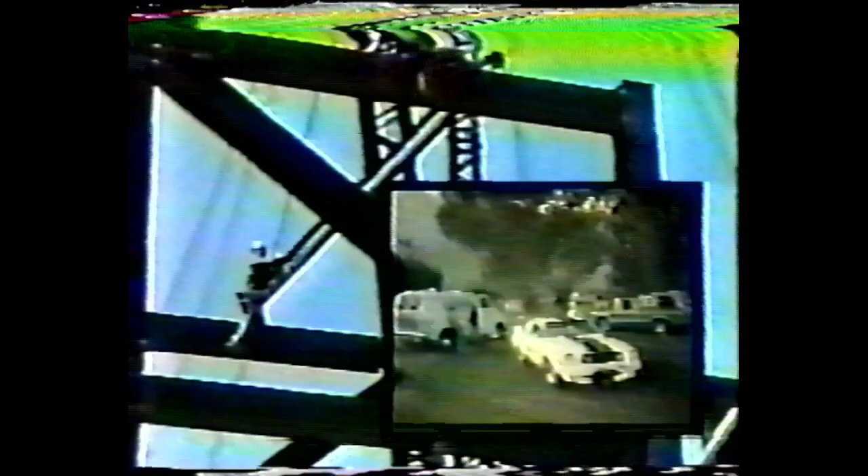It surrounds us, in the cars we drive, in the buildings where we work, in the multitude of products we depend on every day. It protects our possessions and entire nations. It packages our food and our appliances.

For nearly a century, steel has fueled the fire of an industrial revolution. In the process, it has created communities, livelihoods, lifestyles. Each year, the free world consumes nearly 800 million tons of steel. The United States alone requires 1/8 of that amount.

Steel is a manufactured product, born of fire and human effort. But it also is a gift of the earth. It takes iron ore to make steel, and it takes engineers and miners with the help of massive earth-moving machines to unlock those vaults and exploit the vital riches within.

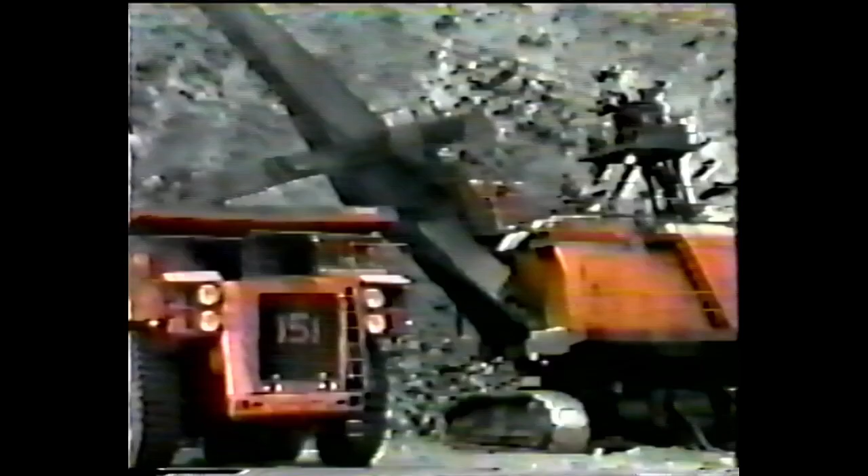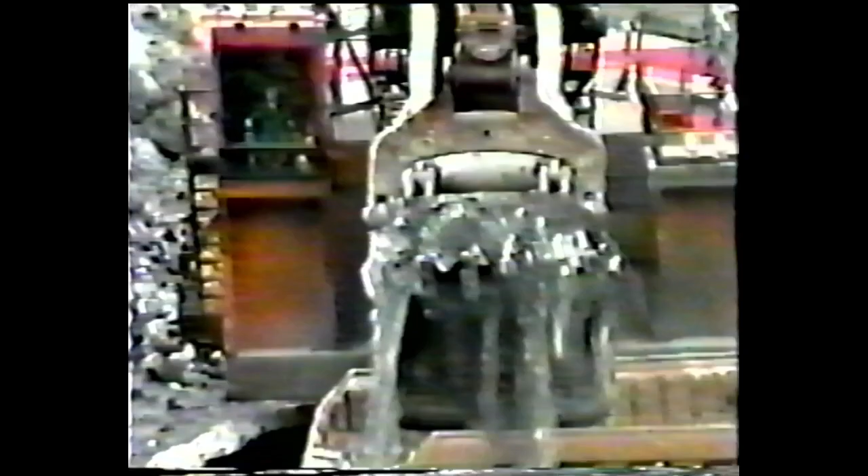For over 3 decades, the Iron Ore Company of Canada has maintained a position of prominence among the iron ore producers of the world. The largest iron ore producer in North America, IOC ships its products throughout the globe to help feed the world's hunger for iron and steel.

IOC's main mining and processing facility is located near Labrador City in the province of Newfoundland, Canada, where the summers are short and winter temperatures can fall to 40 degrees below 0 centigrade. Here, the company can produce up to 20 million tons of refined iron ore products a year.

IOC owns a major interprovincial railroad, the Quebec North Shore and Labrador Railway, which serves both as a shipping line for iron ore cargo and as a lifeline to the communities of western Labrador.

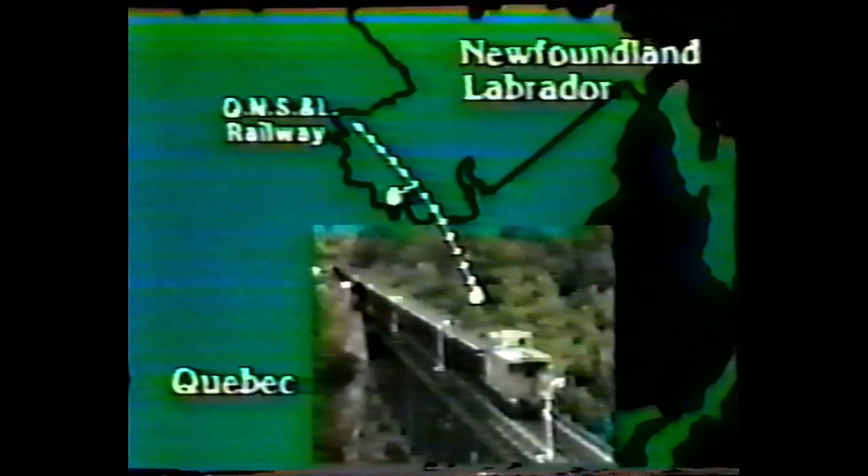At the other end of the railroad, in the port town of Sept-Îles, Quebec, IOC operates one of the largest bulk shipping terminals on the continent. From here, IOC's products are shipped throughout North America and to distant ports of Europe and the Far East.

It's an impressive company with an even more impressive history. Since Leif Erikson first landed on the shores of North America 1,000 years ago, the subarctic forests of northern Quebec and Labrador went largely unexplored.

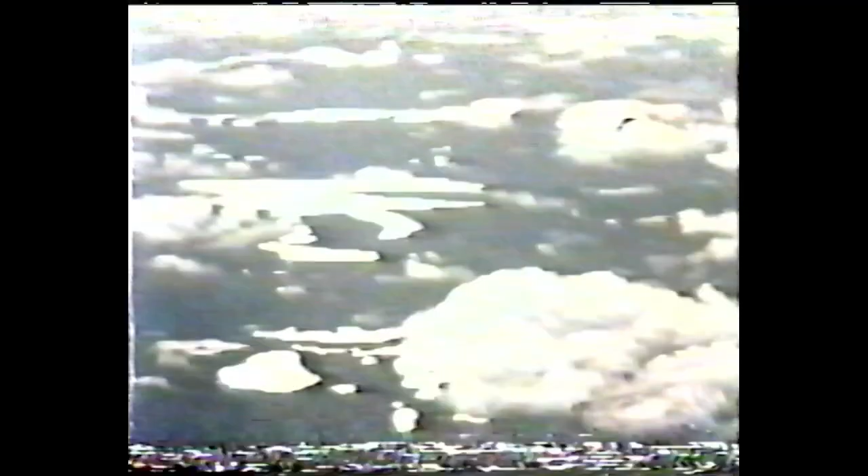But by the 1930s, interest began to grow in the region's potential mineral resources. Of special interest to the United States steel industry was iron ore, because the natural iron ore deposits in the United States were becoming depleted after over half a century of mining.

By the 1940s, as the winds of war swept around the globe and the need for weapons and armor heightened, exploration activity increased, resulting in the discovery of over 400 million tons of iron ore reserves near Knob Lake in the northern reaches of Quebec and Labrador.

But exploiting the deposits presented many obstacles. One was how to retrieve and ship the iron ore from an undeveloped land 40% covered by lakes and marshes that experienced some of the harshest winter weather known to man.

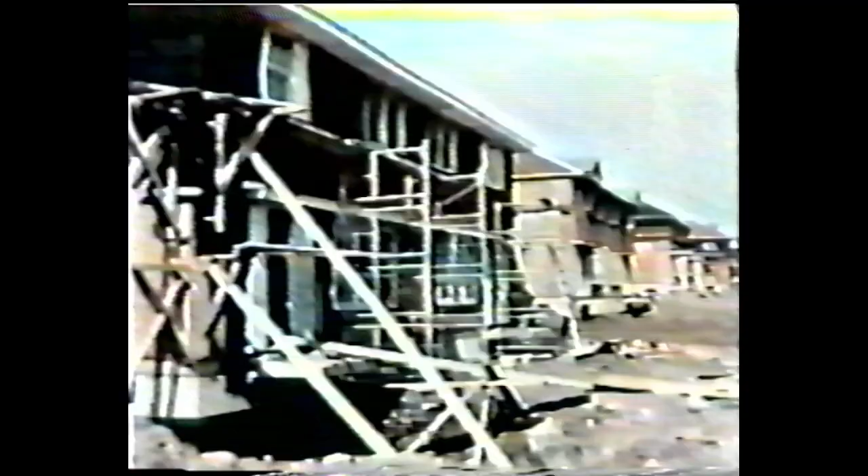Another was how to finance such a project, which would require the construction of massive mining and processing facilities, power plants, and an entire infrastructure of town sites and transportation systems.

In 1949, a consortium of U.S. and Canadian companies, led by the M.A. Hanna Company, a major independent iron ore producer, and including several leading steel producers, agreed to pool their resources and develop the project. The Iron Ore Company of Canada was formed.

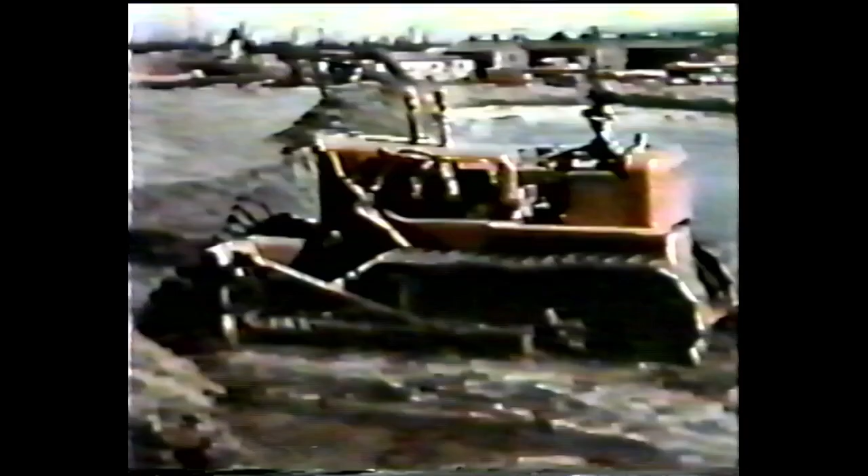Thus began a 4-year construction project that would rival all that preceded in terms of size, risk, and cost. Ore in '54 became the rallying cry, as nearly 7,000 geologists, engineers, and laborers spread out to tame the vast wilderness. Among the most formidable tasks was the construction of a 580-kilometer railway stretching from the then small fishing village of Sept-Îles on the Gulf of St. Lawrence to Knob Lake.

Surveying crews traveled by canoes in summer and dog sleds in winter, a weekly mail drop their only contact with the outside world.

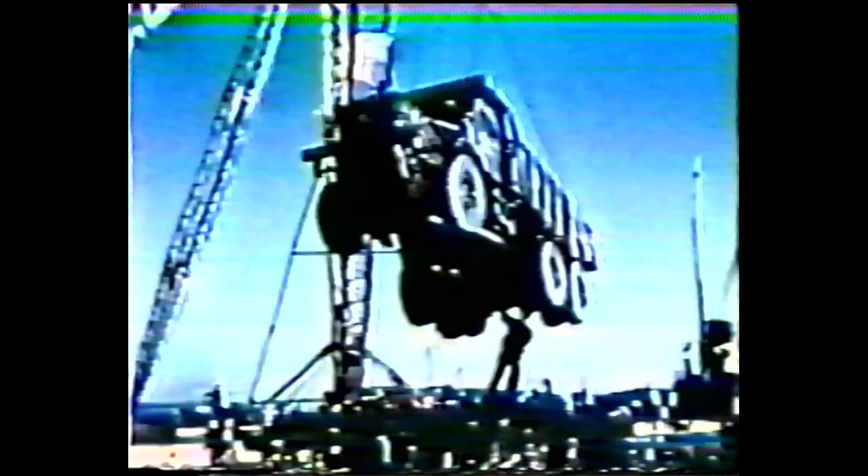Virtually all of the construction materials, from railroad ties to bricks and mortar, had to be shipped to the construction sites. The largest civilian airlift in history up to that time was organized to move materials, men, and machinery north.

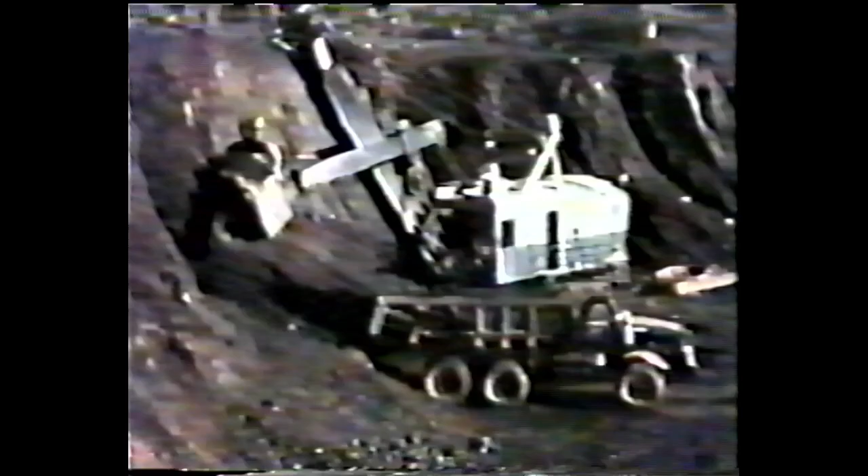In just 4 years, IOC completed its railway, built town sites, including hydroelectric power plants near Sept-Îles and at Schefferville, Quebec, near the mine site, constructed a bulk ship-loading terminal at Sept-Îles, and built a major mining operation, complete with processing plants, loading facilities, and equipment maintenance operations.

On July 15, 1954, the first shipment of iron ore left Schefferville on the newly built Quebec North Shore and Labrador Railway. IOC had met its goal of shipping ore in '54.

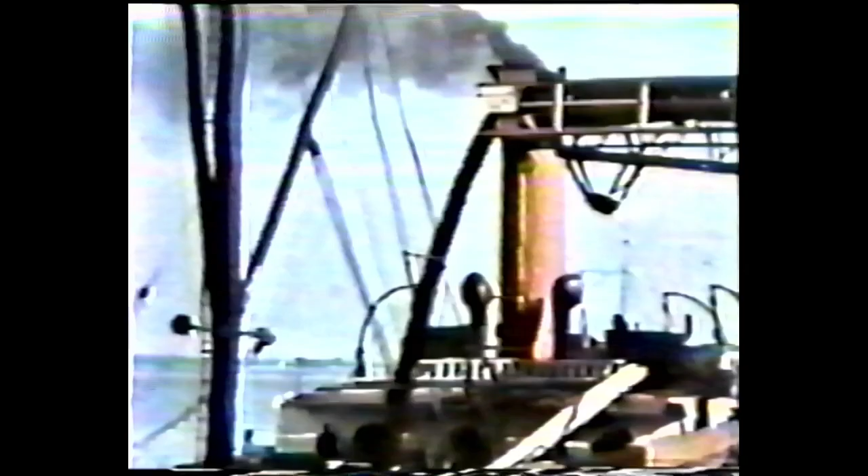In turn, it had created entire communities in a previously undeveloped land. It also provided the impetus for the construction of the St. Lawrence Seaway, which was built in part to provide an economical means of transporting Canada's iron ore to the steel mills of the Midwestern United States.

Before long, IOC embarked on a series of expansion moves to meet an ever-increasing demand for iron ore.

In 1959, construction began on the Carol project near Wabush Lake in Labrador. The project involved construction of a mine, concentrating plant, and pelletizing facility, as well as the current town of Labrador City. In 1968, construction began on a new dock facility at Sept-Îles, big enough to load the largest ocean-going vessels.

By 1970, increasing demand required the expansion of the Carol project and the construction of iron ore processing facilities in Sept-Îles, which had grown from a small fishing village into a thriving cosmopolitan community with one of the highest per capita incomes in all of Canada.

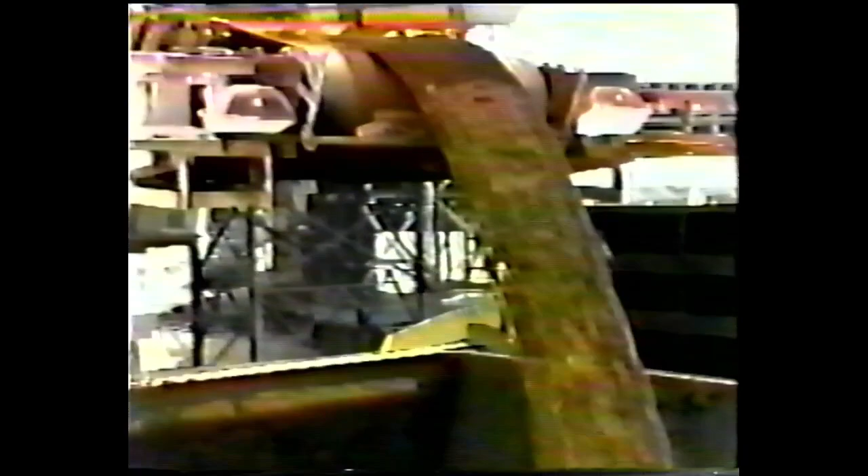And in 1979, IOC, by now the largest iron ore producer in North America, shipped nearly 28 million tons of iron ore products. That would prove to be the company's all-time record, as the 1980s brought recession and restructuring to the global steel industry. Facing reduced demand from a shrinking North American steel industry and intense competition from overseas iron ore producers, IOC was forced to restructure its operations and look to new markets for its products.

Once largely a captive supplier to its steel company owners, IOC had to realign its marketing and operations to serve the highly competitive global marketplace. Today, IOC is a cost-competitive, customer-driven producer of superior quality iron ore pellets and iron ore concentrates. M.A. Hanna Company serves as IOC's managing and sales agent.

At the Carol facility, IOC can produce about 10.5 million tons of iron ore pellets annually, which are sold to steel producers in North America and Europe. It also can produce an additional 8 million to 10 million tons of iron ore concentrates for sale in Europe and the Far East to be converted into sinter, which is used like pellets in the blast furnace.

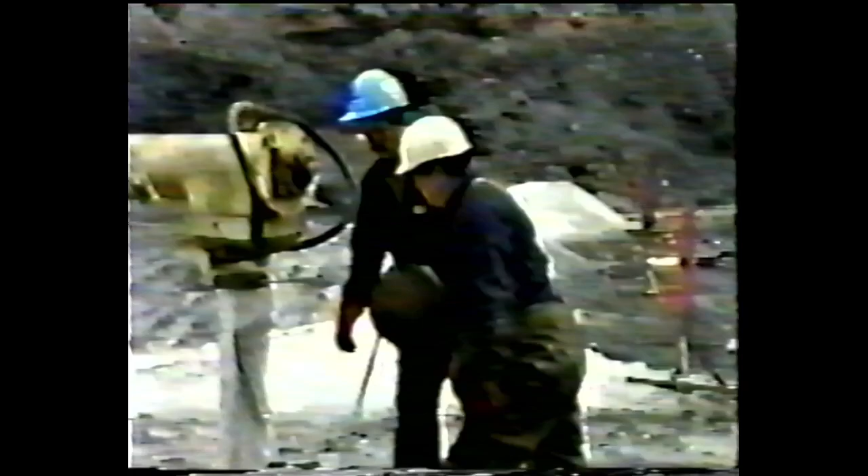The production process begins in one of two open-pit mines at the Carol project. The ore body is a hard specular hematite and magnetite iron formation that must be drilled and blasted with high-power explosives, then dug from the ground by huge 10 and 13 cubic meter electric shovels. The ore is loaded into giant 150-ton diesel-electric trucks that are dispatched using a sophisticated computer system.

The trucks, which cost over $1 million each, haul the chunks of ore to a fully automatic electric train for a 16-kilometer trip to the crusher, which can handle 2 train cars simultaneously. The next stop for the crushed ore is the concentrating facility, where it is upgraded from a natural iron content of about 39% to an iron content of about 66%.

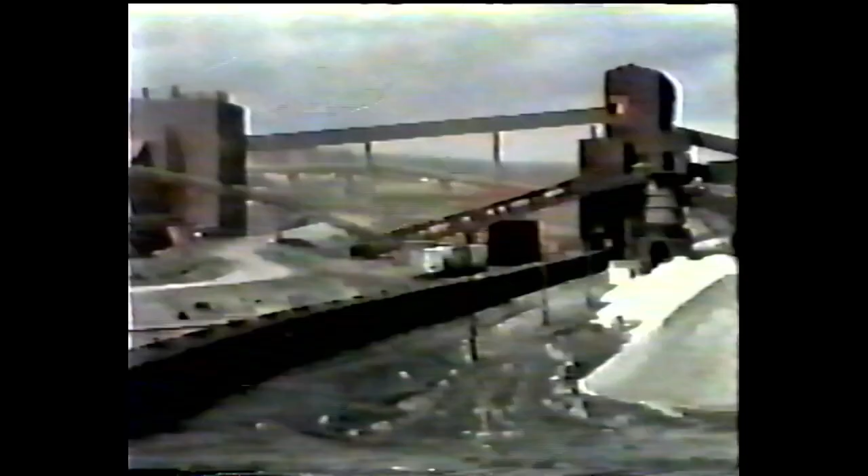At the concentrator, the ore is ground in giant grinding mills into a wet slurry. Then the heavy mineral particles are separated from the light waste rock in a separation process that uses the forces of gravity, centrifugal action, and magnetism. The refined iron ore is then filtered and either shipped to market as iron ore concentrates or conveyed to the pelletizing plant to be processed into iron ore pellets.

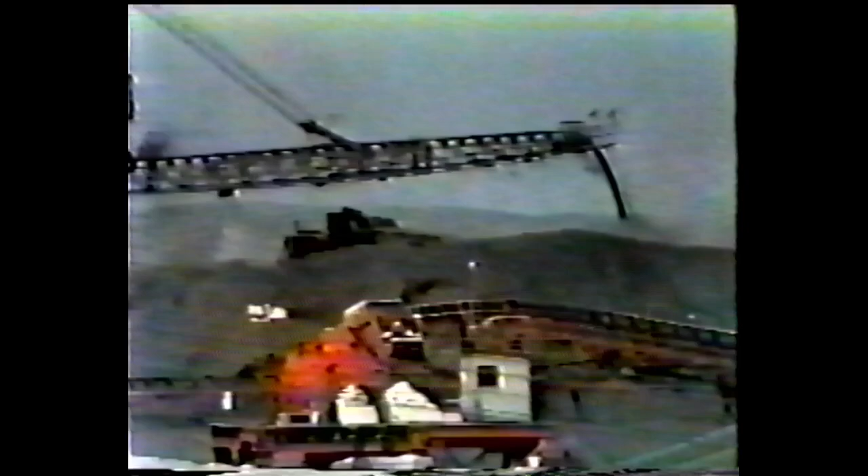In the pellet plant, the concentrates are reground to a finer texture, then conveyed into giant balling drums to be converted into small 3/8-inch spheres called green balls. The green balls travel to the indurating furnace, where they are hardened at nearly 1,200 degrees centigrade into finished pellets. To satisfy varying customer needs, IOC produces two types of pellets, the standard acid pellet and a self-fluxing pellet containing dolomite and limestone, which enhance the steel-making process.

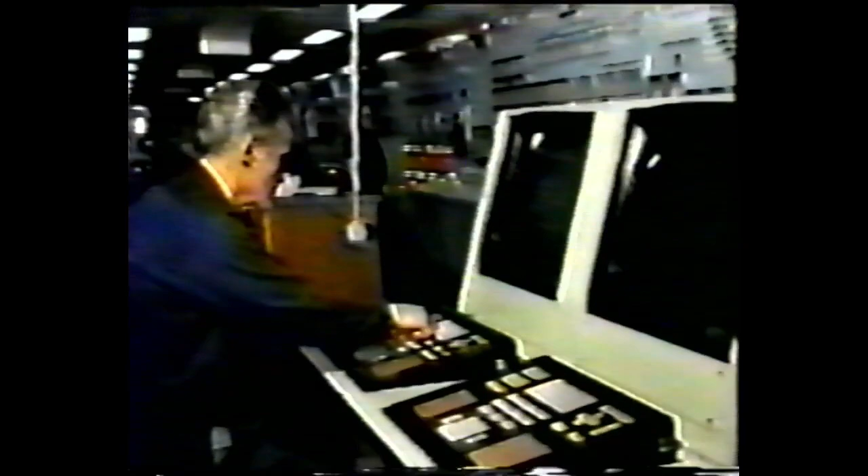IOC goes to great extremes to ensure that product quality is consistent and high. Both the concentrator and the pellet plant are monitored by sophisticated computerized central control rooms that continuously regulate the processing equipment. IOC also employs statistical process controls throughout the production process to ensure consistent product quality.

From the Carol project, the finished concentrates and pellets are shipped on the Quebec North Shore and Labrador Railway to Sept-Îles. It takes about 12 hours to make the 385-kilometer trip through the scenic wilderness. The iron ore trains can be as much as 250 cars long, and an average of 1.5 trains a day make the trip to Sept-Îles. The railway, which also serves as a common carrier, hauls about 18 million tons of cargo annually.

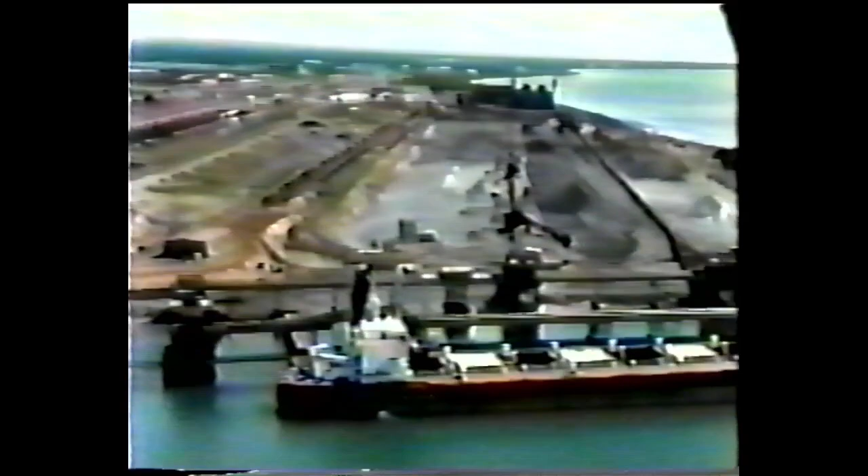At Sept-Îles, the iron ore is unloaded at a rate of 2 cars every 75 seconds. It is then stockpiled to await loading on bulk ore carriers. IOC's 267-meter-long loading dock can berth 250,000-ton ocean-class bulk carriers and holds the single shipment loading record in North America.

But the secret of IOC's success extends beyond the company's sophisticated technology, beyond the hundreds of millions of dollars of invested capital, and beyond the wealth of available iron ore. The secret of IOC's success is the strength of the people who so effectively utilize these assets to produce a price and quality competitive product. Few companies can boast of a more skilled and dedicated workforce.

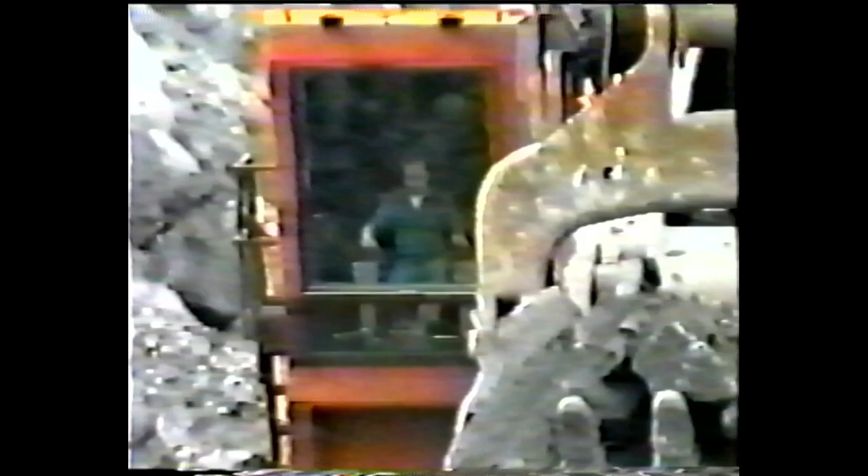Indeed, the same determination and talent that carved IOC out of the wilderness 4 decades ago is today pushing the company forward to meet the demands of the global steel industry. The products of their labor extend to the steel mills of North America, Europe, Japan, and Korea. The testimony to their talent is present in the cars we drive, in the buildings where we work, in the multitude of products we depend on every day. The Iron Ore Company of Canada, customer-driven, quality-conscious, and always in the forefront.

Forbidding north, but over the years one thing became clear. Lost behind these ranges, behind barriers of time and distance, of terrain and isolation, were enormous quantities of minerals, especially iron ore. How these riches were freed for use by man is our story.

The drive for ore started at Sept-Îles on the north shore of the Gulf of St. Lawrence. Montreal is 484 air miles away. Mont-Joli, the nearest railroad point, is 141 air miles away. The ore bodies themselves are far to the north around Knob Lake. Builders pushed a 357-mile railroad north from Sept-Îles to reach them. A completely new town, Schefferville, was built to serve the mining area.

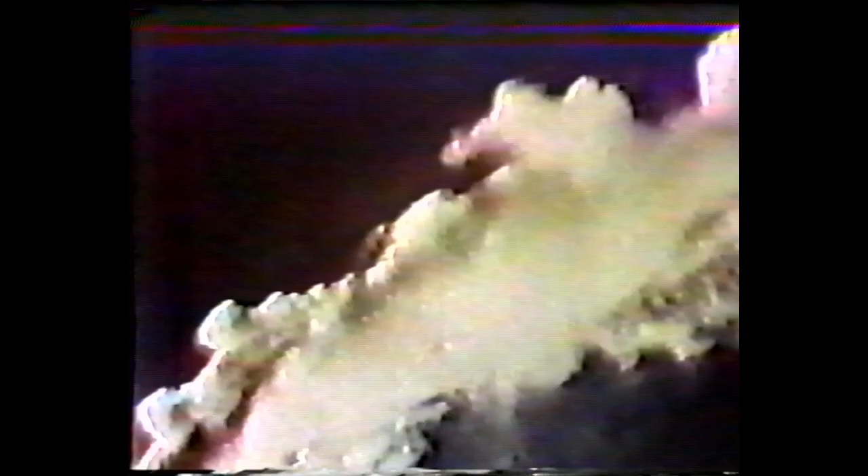A new kind of cloud formed in the untroubled St. Lawrence sky as steam-powered pile drivers hammered down corrosion-resistant steel from Sault Ste. Marie to transform a wilderness beach into a modern dock. Soon, 45,000-ton ore carriers would replace fishing dories along the Sept-Îles waterfront. Out in Sept-Îles Bay, a dredge pumped up thousands of tons of sand and water and pushed them into the area behind the new dock. The builders were making land here, building a firm base for a development of historic importance.

But even from the first days of construction, they paid penalties of distance and isolation. The Gulf of St. Lawrence was the construction crew's highway to the world. All heavy equipment had to come over it. In calm weather, when they were lucky, in foul weather when they weren't, they shipped in a steady stream of massive equipment to carve a way through the wilderness and start iron ore rolling south. Winter as well as summer, the transports delivered what was needed. What they sent ashore reads like a capsule history of construction.

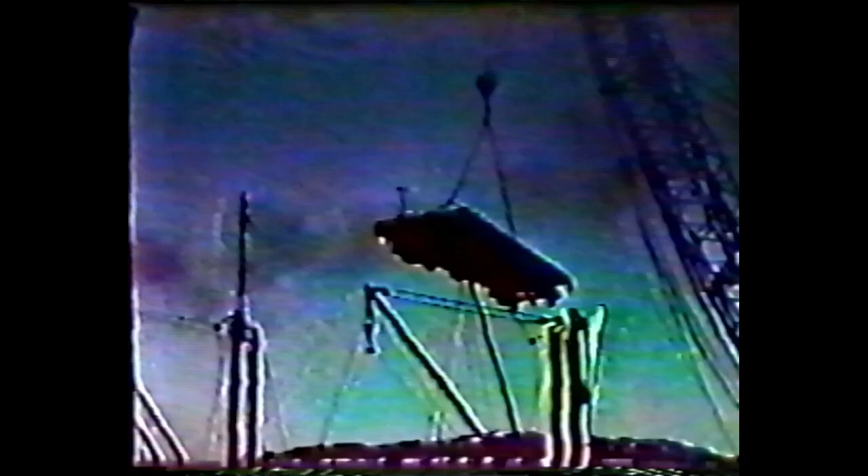Ore cars for the railroad fighting north. Locomotives to pull men and supplies up the line. Tractors to clear the way for construction. Trucks for the new roads now being built. Tank cars for the oil that powered the project. Ponderous giants to move earth and haul ore. Flat cars for northbound supply trains. Aggregate for concrete needed by a $250 million construction job.

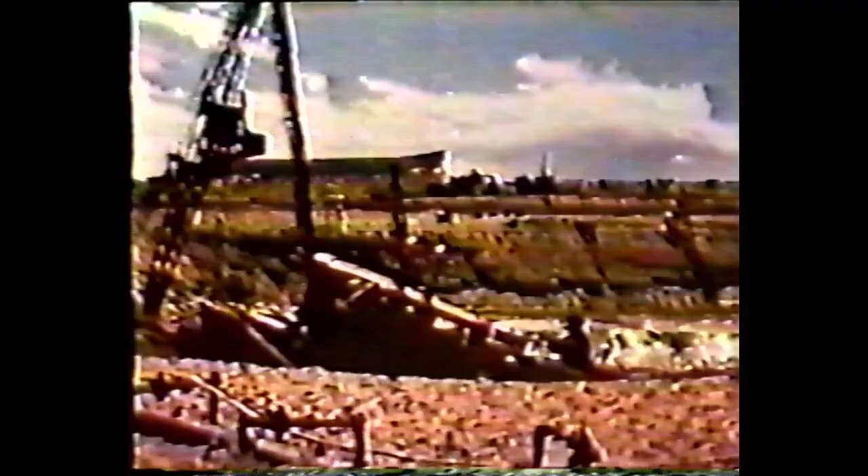4 contracting firms combined to handle the undertaking: Cartier, McNamara, Mannix, and Morrison Knudsen of Canada Limited. Iron Ore Company of Canada, which built the project, is owned by Hollinger Consolidated Gold Mines Limited, M.A. Hanna Company, and 5 steel companies: Armco, National, Republic, Wheeling, and Youngstown Sheet and Tube. They advanced $115 million of the $260 million total cost. The rest was loaned by 19 Canadian and American insurance companies.

Harnessing the energy of the rushing Marguerite River was a vital link in the chain of construction projects that would transform the Sept-Îles area into a modern, integrated loading terminal, harbor, and town site. Here at Falls number 63, on the river's turbulent course down off the Laurentian uplands, builders began by quarrying local rock. They hauled it to a plant they built nearby, then crushed, washed, sorted, and sized it to process it on the spot into high-quality aggregate.

This they used to make concrete, 52,000 cubic yards of it, to put a plug across the gorge of the Marguerite and capture the energy stored in the waters of a lake 53 miles long, diverting it to useful work in moving iron ore out to the furnaces of the free world.

This was a project where everything had to be done at once to meet the need for ore. While some men labored on the Marguerite, others had already pushed steel north and were steadily sending supply trains along it up to the head of the rail, moving in men and material at an ever-increasing tempo, preparing to wage one of the epic battles of all construction history. They were breaking down the grim, guardian barriers of the Old North, pushing ahead with the steel rails and diesel might of the Quebec, North Shore, and Labrador Railway, the railway that would pierce the defenses of the North and open the wasteland to civilization.

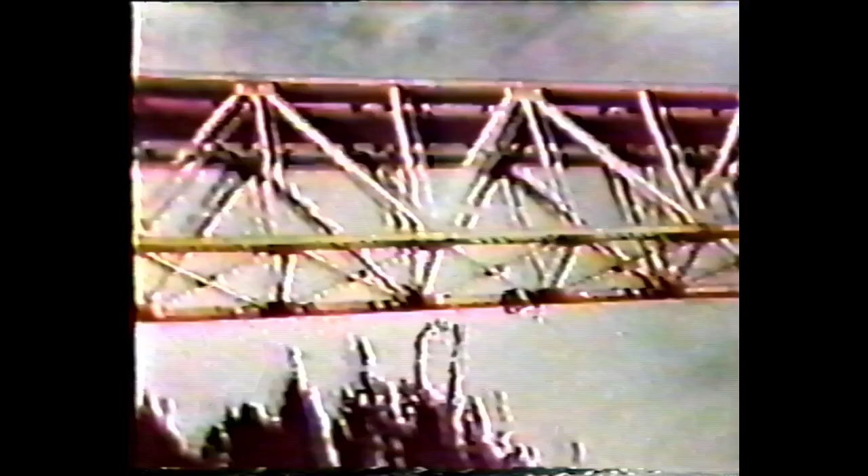Fighting for every inch they made, construction crews drove to complete the 705-foot span that hurdled one of the major barriers on the way north. They bridged the Moisie in June 1952, but the bridge led into rock. Mile after grim, forbidding mile of it, rising in sheer canyon walls.

Before there could ever be ore rolling down to market, there had to be men climbing up, sweating their painful way across the face of the bleak rock, clinging like flies to the harsh cliffsides along the Moisie River. Fighting drill bits and stern faces reflect the nature of the struggle. Between mile 12 and mile 17, road builders blasted down 1 million cubic yards of rock.

And they built themselves a roadbed. 1 million yards of rock and 600 tons of dynamite, and they cleared a way for the trains to keep moving north over the new rail, rolling toward the head of steel, toward the wilderness they had not yet breached. Northbound trains pounded through the new tunnels and across the freshly laid rail with more supplies and yet more equipment for the next stage of the job.

They supplied the 18 major construction camps along a right-of-way stretching farther than from Hamilton to Montreal, and supported 6,900 men, most of them from Quebec and Newfoundland, who labored here at the construction peak. And always the trains drove north, toward the head of rail, toward the new problems the hostile countryside presented.

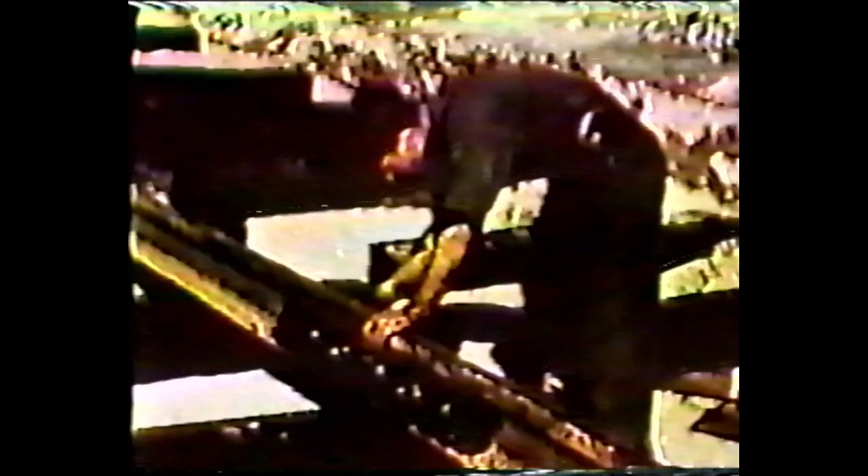As soon as the new track was bolted and spiked, the crane would move forward and repeat the operation. When all the rails had been taken from a car, it was disassembled and lifted off the track. More rail was moved into place, and the crew pushed on.

And wire went north with the rails, 355 miles of it, shining strands for the communication system that would tie the project together. The long ore trains soon to come would be guided by a centralized traffic control system. A dispatcher scores of miles away would have the railroad at his fingertips, controlling it with signals and automatic switches.

In a land where you must fight for every foot you gain, there had to be lots of new answers to transportation problems. Helicopters leapfrogged up the line, reaching points otherwise inaccessible. Experimental swamp buggies were tried to lick the problem of muskeg. Pointers carried survey teams deep into the bush. Project-built boats freighted 150,000 tons across the lake region.

Snowmobiles helped conquer the problems of winter in the backcountry, and there was a constant struggle to keep the vital railroad open to the construction area. Convoys of great trucks fought their way north for 10 weeks across the frozen lakes and swamps during 2 winters, burdened with heavy equipment and supplies for spring work up the line.

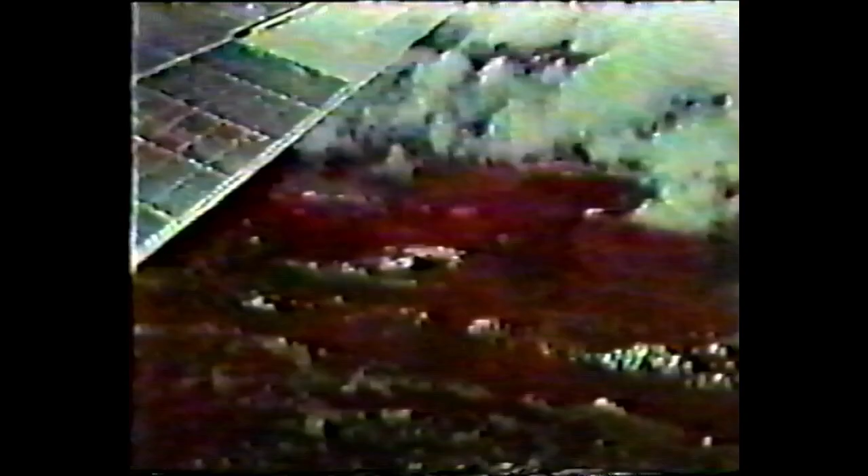Hollinger-Ungava carried nearly 139,000 passengers and 170 million pounds of air freight, totaling nearly 15 million ton miles, and all without scratching a crewman or a passenger. The airline missed only 11 operating days. There were 14 landing strips up the line, many of them. Crosswind landing gear enabled aircraft to use them in spite of the hazard of tricky cross currents swirling through the deep valleys. The story at Menihek sums up HUT's triumphs.

At Menihek Rapids, the airline flew in 7,000 gallons of gasoline a day and 190,000 bags of cement to build a 517-foot dam. And at Menihek, the North struck back savagely. A temporary cofferdam and bridge washed out in the spring of 1952, destroying months of effort. Throughout the wilderness, data on stream flow, runoff, and other information engineers take for granted in more gentle lands was completely missing. The nature of the violent North was an inescapable and unpredictable factor in all calculations.

But with a persistence as overpowering as the machines they used, construction crews carved themselves out a place to stand on the water-soaked silt. At Menihek, the central concrete structure is flanked by an earth dam 3 miles long. Once again, local rock furnished aggregate. It was crushed and washed to make a suitable building material for the severe demands it would have to meet. Mixed with the 190,000 bags of cement the airlift flew in and used to make concrete, 31,000 cubic yards of it to dam the rapids and defy the springtime ice.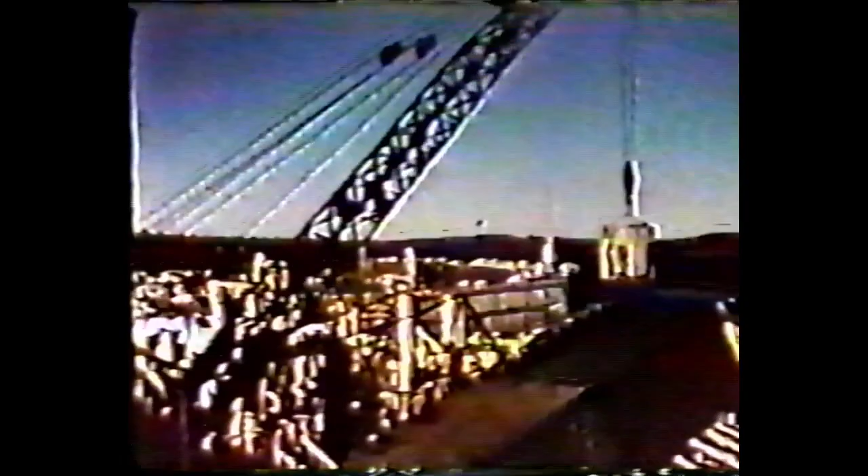The fury of the spring runoff would now turn generators to power mining operations, and the back of the dam itself became a bridge to carry the lengthening railroad north to the ore bodies. Now supply trains were moving steadily into the perpetual twilight of the subarctic winter as Sept-Îles became a staging area for a last massive push up the line. It was the winter of 1953-54. In just a few months, the first shovels had to be working in ore.

Builders moved up tough and able men who drove ahead for 10 and 12 hours a day in 50 below zero weather. Machines are strained to the utmost under these conditions. Some operate at only 50% efficiency. Engines that stop can be started only with great difficulty, but the men were invincible. In December 1953, track-laying crews made more than 2 miles a day for 10 days. Many of the 440 miles of rail on the project were laid under conditions like these.

It was 56 below on the morning of February 13, 1954. Jules R. Timmins of Hollinger Consolidated Gold Mines drove the Golden Spike, symbolizing the end of rail construction, although it did warm up to a balmy 20 below for the ceremonies.

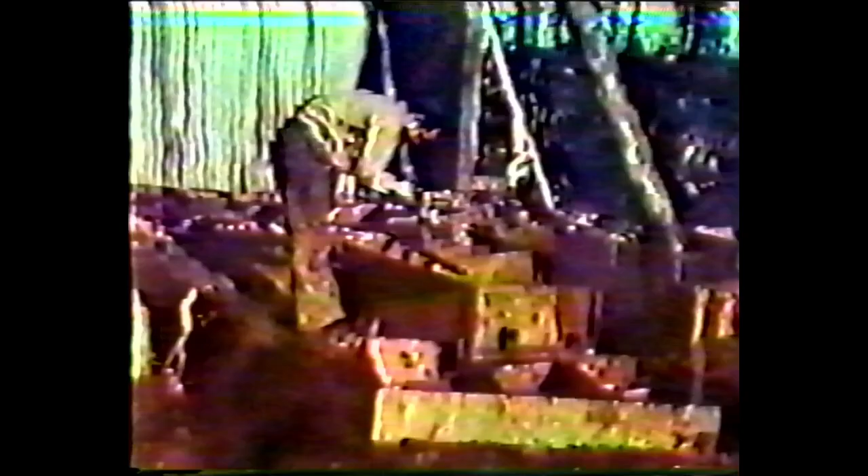And all during the time construction crews were driving rail north, other men had been working in the ore country itself. Burnt Creek, now the site of a large mine, was the first settlement. Exploration drilling was based here. Drill crews sank more than 250,000 feet of drill holes and proved 417 million long tons of direct shipping iron ore, revealing the promise of the North.

Nearby Knob Lake, now supplanted by the new town of Schefferville, was the seaplane base. Float planes working out of this area ranged far across the interior, supplying prospectors and geologists engaged in a search for new deposits that continues to this day. These men in their crude camps were the first heralds of a new age, bringing a new urgency to the unhurried North.

Once they came and saw and reported, nothing could be the same. Change moved into an unchanging land. Steelwork began to rise against gray-green hills. On one side of an ancient valley, civilization. On the other, the timeless North.

Men began to move across the dreary face of a land so forbidding even the caribou had left it. Soft touches appeared even in the hard North. And suddenly, over the hill is a town, bustling, alive, an outpost on the doorstep of the Arctic with great promise for future development of much of a new Canadian frontier.

A town with construction of all kinds going on. The original mining activity has encouraged other building. Now that the railroad has tied the North to the world of men, Schefferville is the center for activities throughout a vast hinterland.

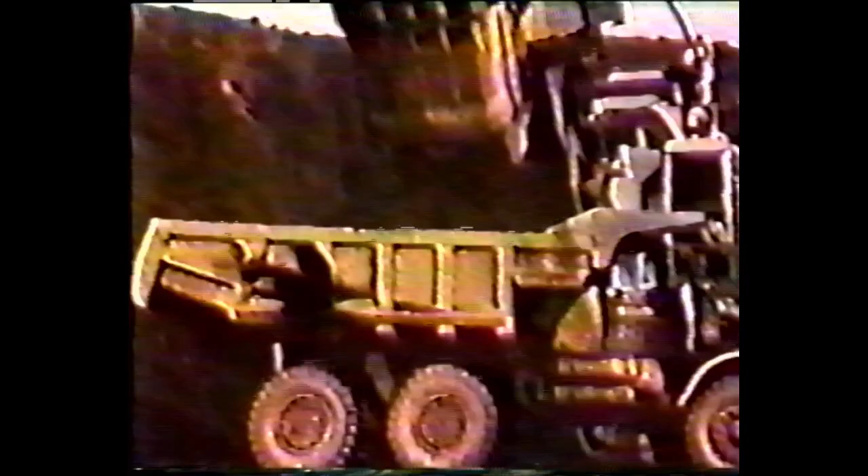In the mining season of roughly 6.5 months, these pits can produce between 12 and 15 million tons of iron ore. This from the heart of a barren subarctic wilderness. An ultimate production of more than 20 million tons is possible.

After they leave the shovels, trucks labor across the ever-deepening pits toward railroad bins that rise starkly against the horizon. This is high-grade, direct shipping ore. It needs no concentration, but as trucks dump it, the ore is screened and crushed to maintain a relatively uniform size.

Then it's conveyed to the top of bins sitting astride railroad spurs. Empty cars roll underneath to receive as much as 85 long tons of ore. The whole mining region, centering around the now abandoned settlement of Burnt Creek, is laced with spurs that lead back to a central yard, Silver Lake, where trains are made up for the long trip south.

There, cars are sampled. Iron ore is a natural product, and like all natural products, it varies. Samples are taken to make sure that a furnace master thousands of miles away gets just the blend he specified. Then the long trains move south.

Freighted with promise. Each represents $2.5 million worth of rolling stock, carrying down the ore needed to supplement traditional iron ore sources so that North America's growth can continue unhampered, and needed also to help the recovery and expansion of Western European economies, which are rapidly outgrowing sources they relied on in generations past. Iron ore from the north is helping build the future throughout the free world.

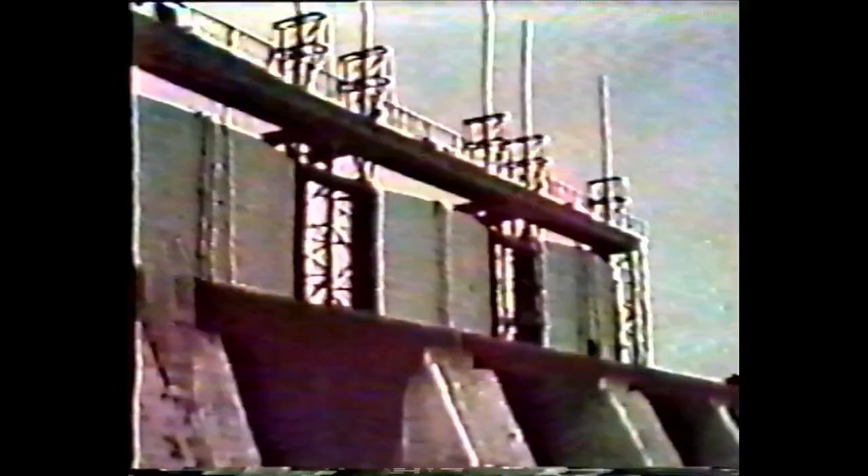And the fury of the rushing water spends itself in turbines that generate 12,000 horsepower, used to dig out ore and start it south. Ready at Marguerite, where falling water, idle since before the dawn of history, has been put to work as electric muscles move ore on the last stages of its long journey from the north into the holds of a fleet of deep-water ore carriers.

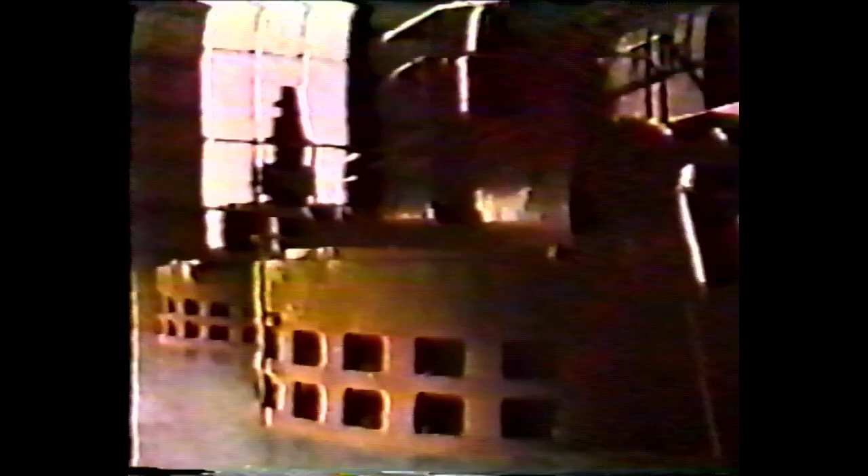The harnessed fury of the falls turns two 12,500 horsepower generators which supply the needs of the terminal and dock area. They push 44,000 volts up over the hill and around the bay to Sept-Îles, where it powers a large-scale shiploading and harbor operation. Here, a triumph of 20th century industrial pioneering has changed a fishing village into a name familiar to seafaring men the world over.

And we're ready here, too, ready with a vast net of facilities where once there was only black spruce and sand. The iron ore terminal area back of the docks receives as many as 10 trains a day, rolling in from the iron country to the north.

They are broken up at the far end of the receiving yard as a gentle shove from a locomotive starts cars rolling down grade from a high point known as a hump. Ponderous, unhurried, but always on the move, the cars add up to a force as irresistible as a river rising slowly to flood, a flood of new ore for the hungry furnaces.

Gravity keeps the cars rolling while an operator in the tower controls their speed and switches them on to any of 12 classification tracks, depending on their analysis of ore. Ore of many kinds and grades can be blended to provide a ship's cargo tailored to the consumer's specifications. Then a sidearm pusher cuts out cars like a dog takes sheep from a flock and starts them toward the dumper.

A cable-driven barney pushes them into the tandem rotary dumper that can turn over and empty two cars every 67 seconds. Finally, empty cars circle away after they've been dumped. In less than 72 hours, they'll be back in Sept-Îles with another load.

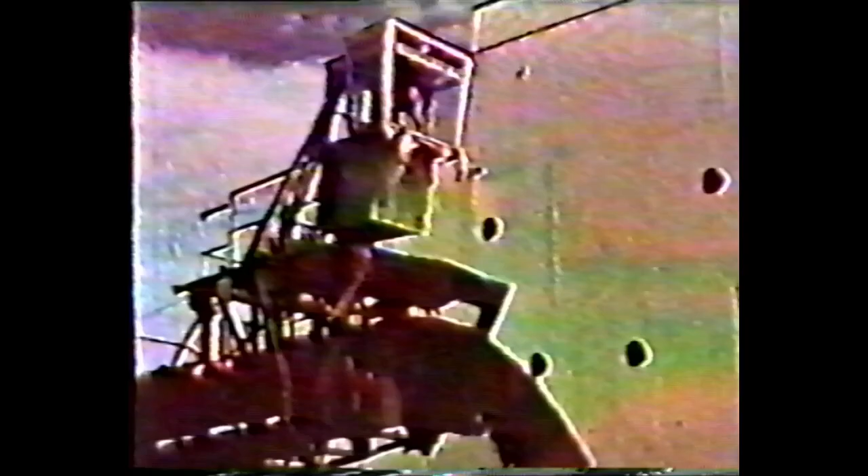This is the ore that will enter the lives of millions, in forms as varied as jet aircraft, bulldozers, and paring knives. We live in a world built of steel, by steel, and with steel. And steel production depends on having iron ore available when you need it, where you need it, and in the quantities you need.

As many as a dozen ships a day clear from Sept-Îles during the peak of the shipping season, with cargoes destined for great steel-making centers all over two continents. Large shipments move from Sept-Îles to East Coast ports such as Philadelphia and Baltimore. Other ships clear for Rotterdam and other European ports. Hamilton, Cleveland, Ashtabula, and similar Great Lakes ports will receive direct shipments in large vessels when the St. Lawrence Seaway is completed. Until seaway completion, however, much ore is shipped to Contrecoeur up the St. Lawrence, 25 miles from Montreal.

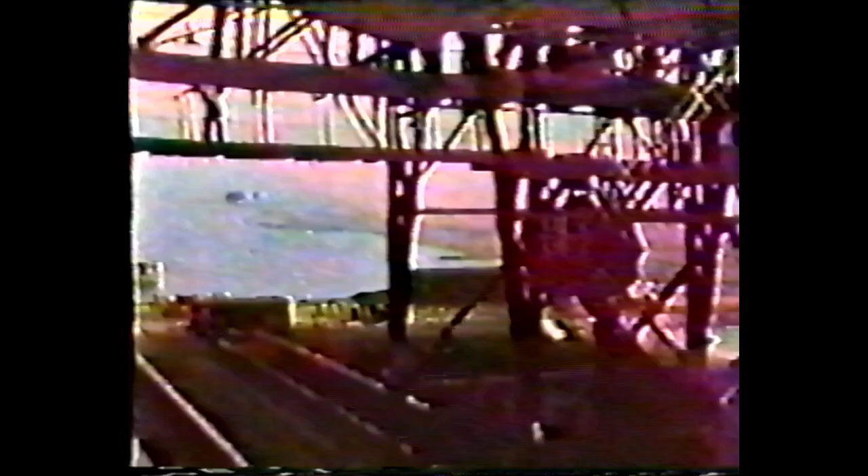Here, as part of the overall Quebec-Labrador project, we built an integrated transshipment point. Ships from Sept-Îles, some of them in a regular shuttle service, bring in as much as 30,000 tons of ore at a time. Since these giant carriers cannot get past the St. Lawrence Rapids, they are unloaded here.

Their ore can be stockpiled for later transshipment, or it can go directly to the mills by one of two ways. When overland haulage proves the most desirable method, ore is shipped by rail to the traditional steel centers of the American Midwest. The conveyors can be fed either from stockpile or directly from a ship under the unloading tower.

Ore can also be fed into small freighters that can navigate existing St. Lawrence channels into the Great Lakes to reach other markets and consumers. But wherever and however it moves, the tumbling cascade of ore marks the defeat of the Old North.

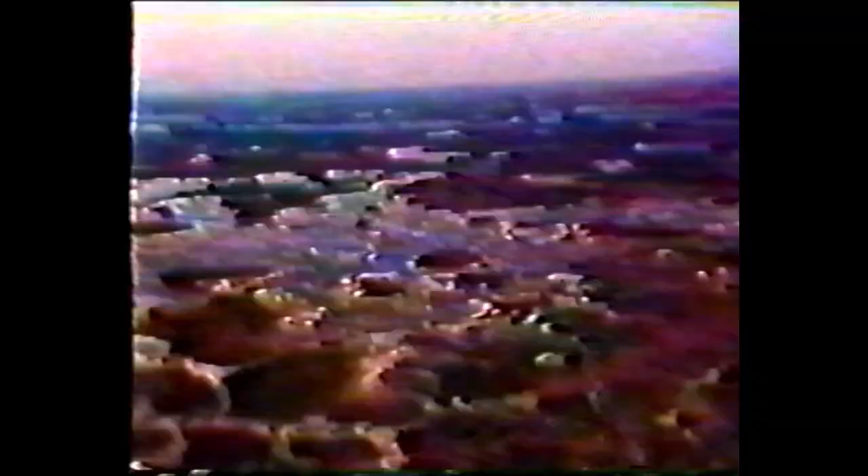This vast, remote, and lonely land we found has changed now for the first time since the glaciers left it. The land God gave to Cain, as the first explorers called it, has been reclaimed for human use. Years of effort, thousands of men, $250 million, and the challenge of the North has been overcome.

Steadily, almost routinely now, the ore rolls to Sept-Îles. Free men and free economies everywhere have a new resource at their command, a new strength to draw on. Sailing out from Sept-Îles on every tide, deep-laden ships carry the news of the promise fulfilled and reward earned by all the bitter years of struggle up the line. The reward of iron ore from the North.

Formation of the Labrador Mining and Exploration Company. They obtained a concession from the government of Newfoundland for mineral and power rights in an area of 20,000 square miles. Later, control of the company was obtained by Hollinger Consolidated Gold Mines. And in 1942, the M.A. Hanna Company of Cleveland joined forces with the Hollinger interests under the leadership of Jules R. Timmins of Hollinger and George M. Humphrey of Hanna.

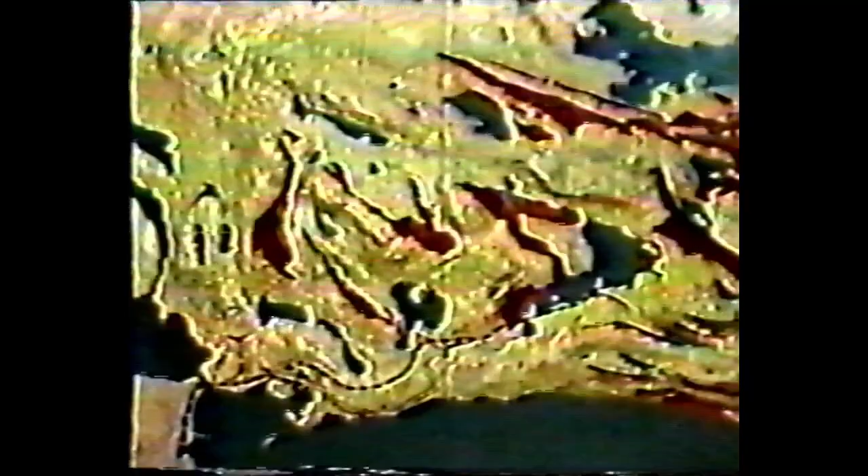Work on this railway began in May 1959, and in June 1960, little more than a year later, the first passenger train traveled the new Northern Land Railway. From then on, we were able to take full advantage of the 42-mile railway to carry heavy equipment to the site of the Carol operation.

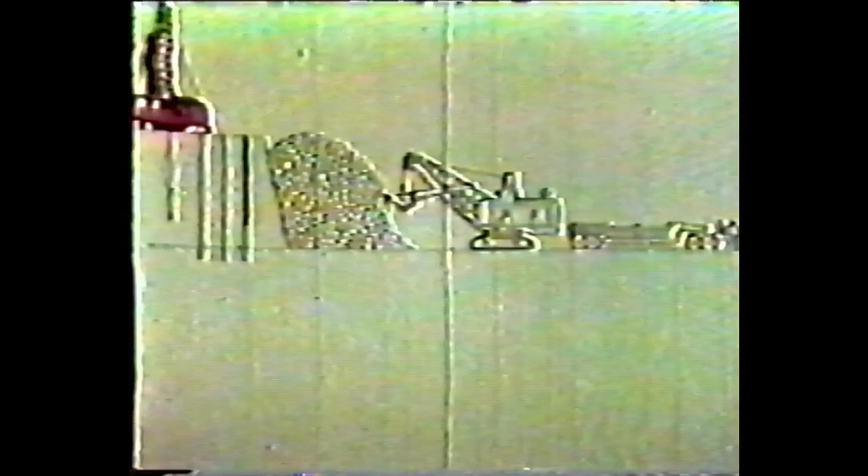Blast holes are drilled in each 45-foot bench. The holes are made about 50 feet deep to break to an even pit floor. Drill holes are loaded with explosive and blasted. 10 cubic yard electric shovels load ore into a fleet of 100-ton haulage trucks.

Most of the drilling is done with tricone rotary bits, which chip the rock to break it. Research was done on the bits themselves, and the results of this work helped considerably, not only in increasing the efficiency of the drills, but in prolonging the life of the drill bits as well.

However, the rock in the Carol area is exceptionally hard in places, and it is then more economical to use jet-piercing drills. These drills use oxygen produced in our own plant and fuel oil to produce a very high temperature flame.

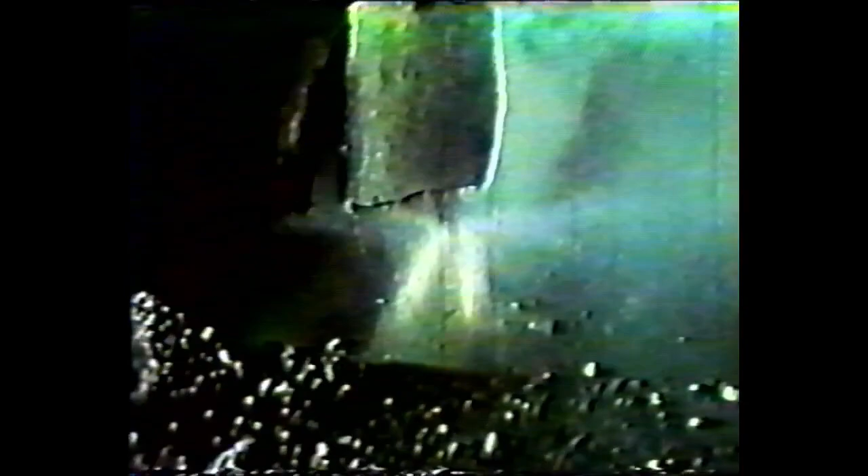Water is then used to cool the burner and to produce thermal shock in the heated rock. The flame shatters or spalls the rock by thermal shock and its supersonic velocity. The black diamonds show a nozzle velocity of about Mach 5. This phenomenon is a shock wave which develops in the gas at speeds exceeding the speed of sound.

Jet piercing is more or less a streamlined adaptation of methods used in the very early days of mining. Miners of ancient days made fire in the rock to heat it, then poured cold water on it to shatter it. The steam carries the cuttings from the hole.

The drill pattern is engineered and laid out in the field showing depth, spacing, and burden. Intensive records kept of every blast make it possible for the engineers to hold a very close control over future blasts. At the same time, we also are developing new blasting materials.

Before the primer is lowered into the blast hole, it is necessary to pump out any water which may have accumulated in the hole. After the primer is lowered into the hole, the slurry is pumped in from a special explosives truck. The explosive is detonated by special primers in each hole and an instantaneous fuse which detonates at 4 miles per second.

The roads are blocked as the delays are tied in. The rows of holes are detonated in a special order by tying in 15 millisecond delays into the trunk line.

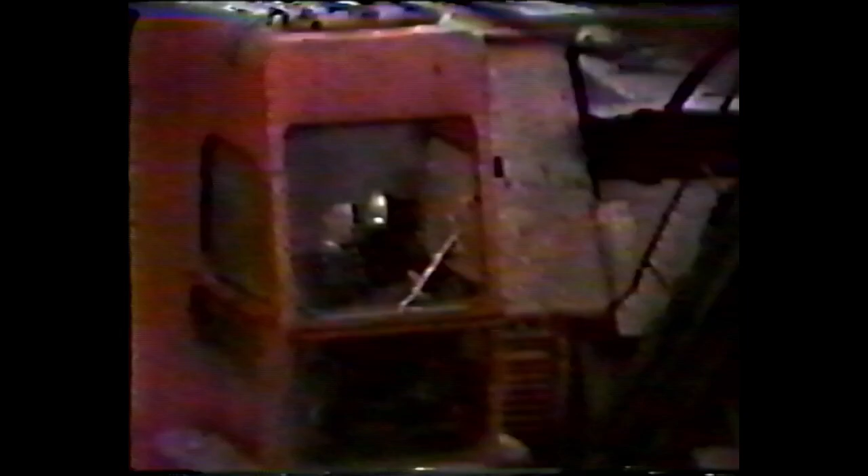Dump trucks are used for stripping waste rock, but specially designed 100-ton trailer trucks are used for hauling ore. The trailer trucks are side dumped.

Routine maintenance is done in a service garage near the mine. Major repairs are carried out in the main shops near the concentrator within the industrial complex.

Here, the transmission is removed from under a haulage truck. It will be taken to the component shop for repair. Here, another mechanic is repairing a front axle, and a tractor transmission.

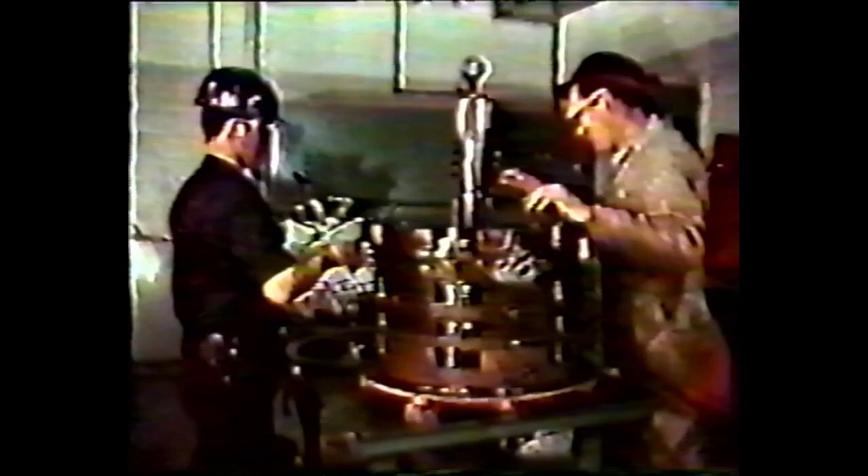Whenever possible, components are bench tested. Here we see a steering booster being tested before going to storage. A truck engine is removed from storage, ready for use. Components are always kept ready for use and can be replaced as vehicles are needed, so that equipment gets back into operation with a minimum of delay.

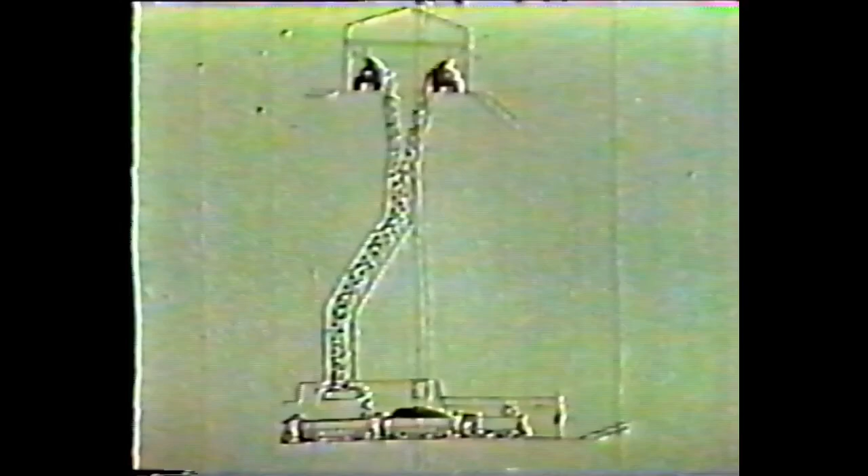Once the 100-ton trailer truck is loaded with ore, its destination is the loading pocket. Trucks in the mine are side dumped into the loading pocket. The ore is fed from the bottom of the pocket by pan feeder into an automatic train.

The massive 100-ton truck moves into the pocket to be side dumped. Dumping is done semi-automatically on a signal from the driver. A hook is attached to the truck, and while that hook is connected, a bell warns the driver that the hook is still attached. He does not drive away until the bell stops ringing.

This is the first fully automatic train operation in the world, and no crew is necessary on any of the 4 trains which operate from the mine to the crusher. Train movements are controlled from a central computer near the crusher, and signals are transmitted through the rails to an inductive receiver at the front and rear of each train.

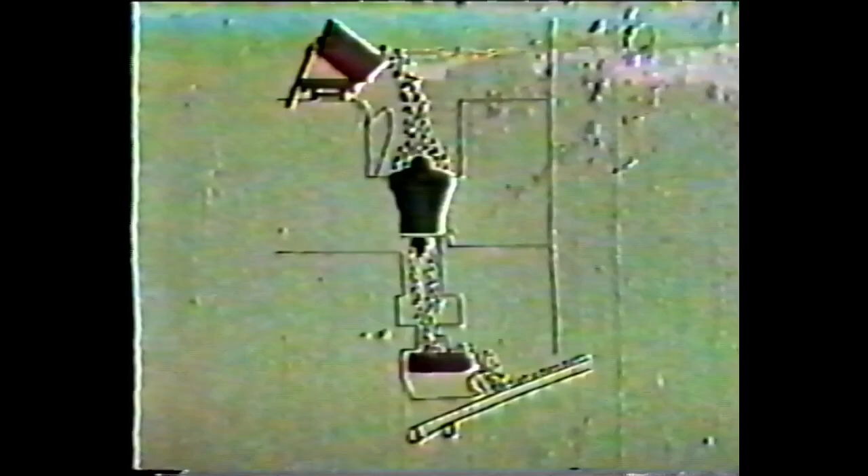Cars are side dumped directly into the 60 by 89-inch gyratory crusher. Crushed ore then drops to a 60-inch primary conveyor. The Iron Ore Company's gyratory crusher was the biggest ever to be made in Canada. This crusher will reduce each 100-ton carload to minus 6 inches in as little as 28 seconds.

Armored glass windows provide the operator with an unobstructed view of the car dumping and the crusher throat. The crushed ore is fed by the primary conveyor to storage. The 60-inch primary conveyor feeds ore onto the 72-inch tripper conveyor and carries it to the ore storage building. Each grinding mill is fed by 3 pan feeders and its own feed conveyor.

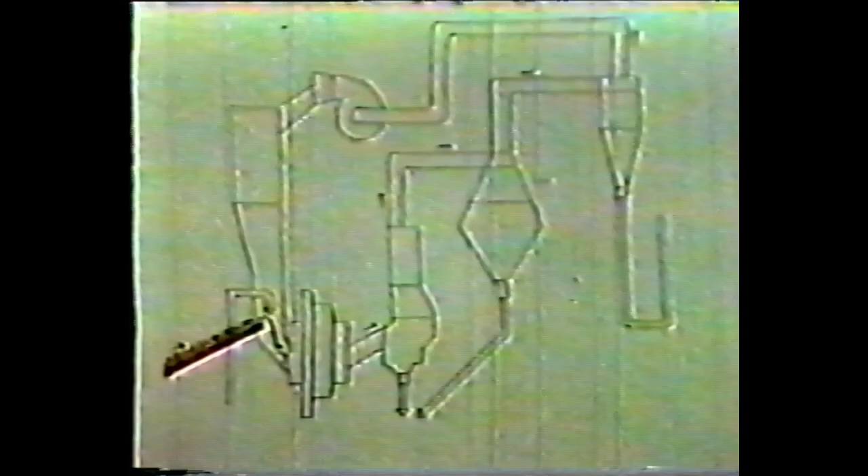This building stores about 16 hours of crushed ore. Ore is fed into the 21-foot diameter mills where it is ground by autogenous action. Air blown through the mill removes the dry ground product, which is carried to the vertical classifier. The air velocity is reduced and some of the coarse ground product drops out. The air continues to the baffle separator, where more coarse ground product drops out.

The airflow continues to two cyclones, which remove fine ground product. The air returns through the main fan to heaters for drying and recirculates to the mill. Ore is conveyed to the grinding mills from the crusher via the storage building conveyors. The ore grinds itself in the tumbling action of the mill.

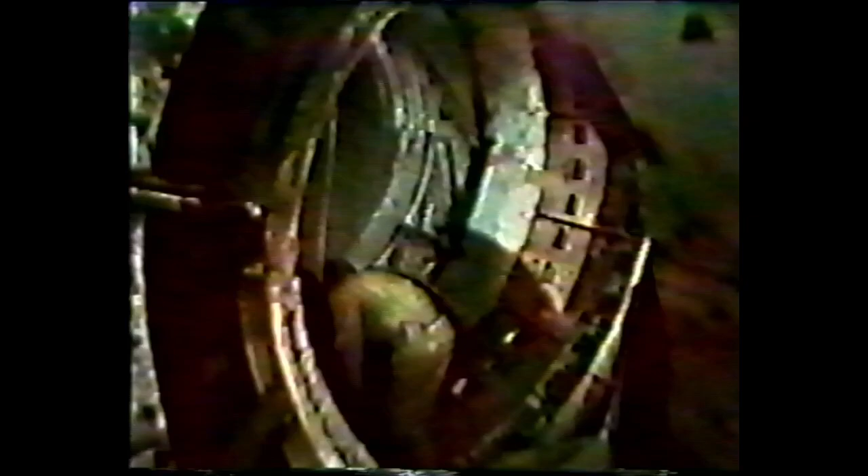The mill liners are changed regularly as they become worn. As part of the same regular preventative maintenance program, an electrician is reconnecting a main fan motor after inspection.

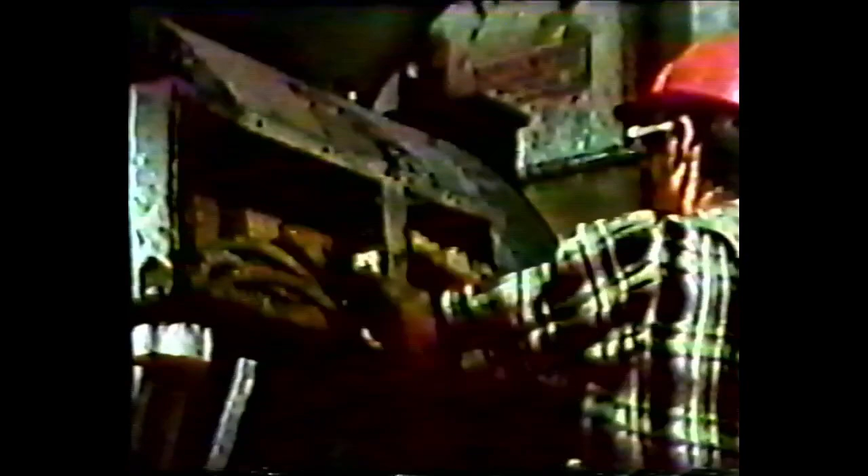Coarse ground product from the vertical classifier and baffle separators is screened at 14 mesh. Oversize is returned to the mill. Undersize goes to storage. Some air is removed from the circuit after it has passed the main fan. It is cleaned in wet scrubbers and exhausted to atmosphere to create a negative pressure in the system. The screens are enclosed to minimize dust in the mill.

The air exhausted to atmosphere is cleaned in wet scrubbers to remove most of the dust. The coarse ground product from the vertical classifier and baffle separator is now conveyed and distributed by tripper to coarse ore storage bins. The fine product from cyclones is carried by air slides to a fine ore storage bin. The products are taken from the bins by individual conveyors to pulping boxes where water is added.

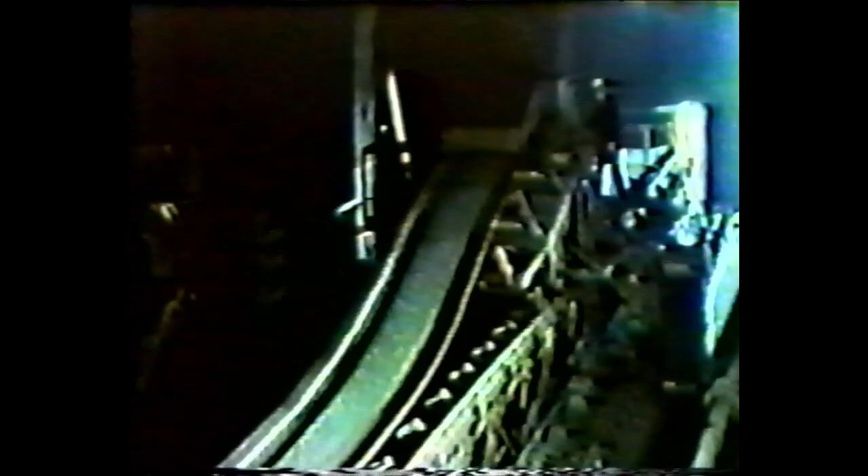And so the ground ore leaves the grinding section of the concentrator by conveyor to the process section. All the equipment and functions pertaining to this part of the concentrator are operated and controlled from a central grinding and classification control room. Because of the size, complexity, and fast response required to operate such a system efficiently, automatic controls and instrumentation are extensively used.

Water is added to the ground ore in the pulping boxes, and the pulp is pumped from collector to distributor boxes. The ground ore, still running 37% iron, is distributed to rougher spirals where the action of gravity and centrifugal force separate the ore from waste.

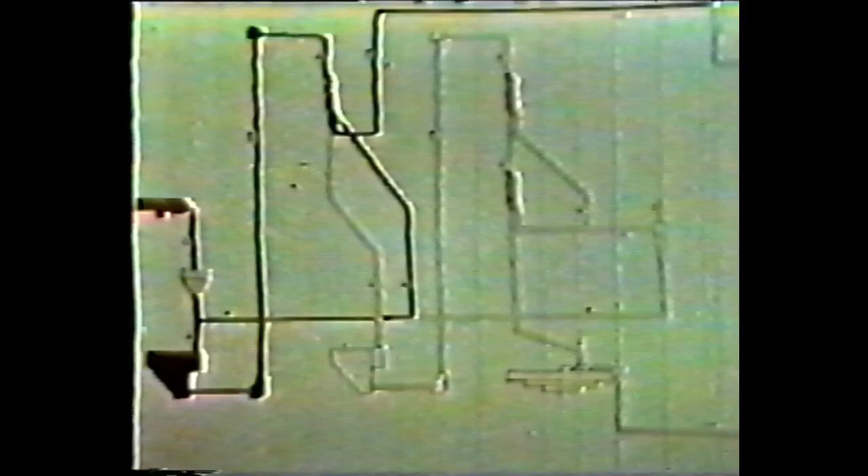Rougher spirals produce a low specific gravity tailings which goes for further processing. A middling fraction is returned in closed circuit, while the first stage concentrate produced is collected and pumped to the cleaner spirals.

These spirals produce a middling fraction which is partially dewatered and returned in closed circuit, and a second stage concentrate. This second stage concentrate passes to recleaner spirals, which also produce a middling fraction to be returned in closed circuit, and a final concentrate running about 66% iron, which is dewatered in horizontal filters before going to the pellet plant.

The pumps are controlled from the control room and feed the pulp to spirals. Fresh water is pumped to the mills at 25,000 gallons per minute, and most of it is reclaimed. Approximately 82,000 gallons per minute are in constant circulation.

In the Humphreys spiral process, ground ore mixed with large quantities of water is allowed to flow through the spirals. The resulting centrifugal force combined with the buoyant effect of the water act to separate ore and tailings. Gravity and centrifugal force cause the lighter waste products to flow here, the concentrate to flow here, and wash water to aid the separation.

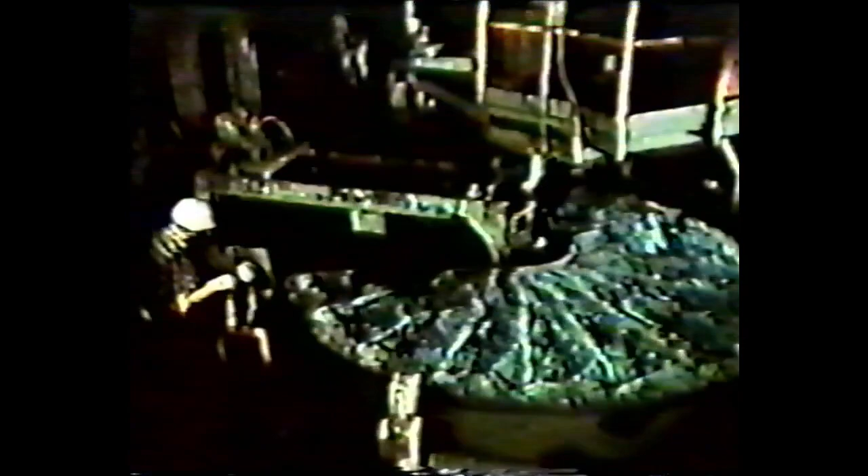Products are collected by a series of collector pipes, and the concentrate is dried in horizontal filters. From the filter discharge, the concentrate is conveyed to the pellet plant, or direct to the load-out area for shipping. The various banks of spirals, collector pipes, and horizontal filters form the process section and is controlled by an operator in a special process control room close by.

Regular maintenance keeps the plant in good operating condition. Filter cloths are changed. Maintenance crews are available for arc air cutting, for welding, and for grinding. A comprehensive warehouse and control system simplifies maintenance and repair.

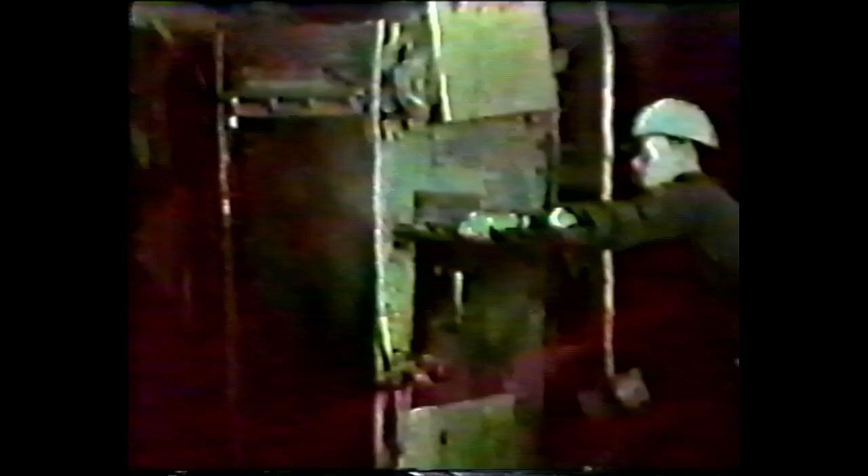At every stage, the process involves comprehensive sampling. Most of this is automatic, but notices in various locations keep attendance to a regular schedule wherever manual sampling is necessary. Samples are analyzed in the well-equipped laboratory in the mill building.

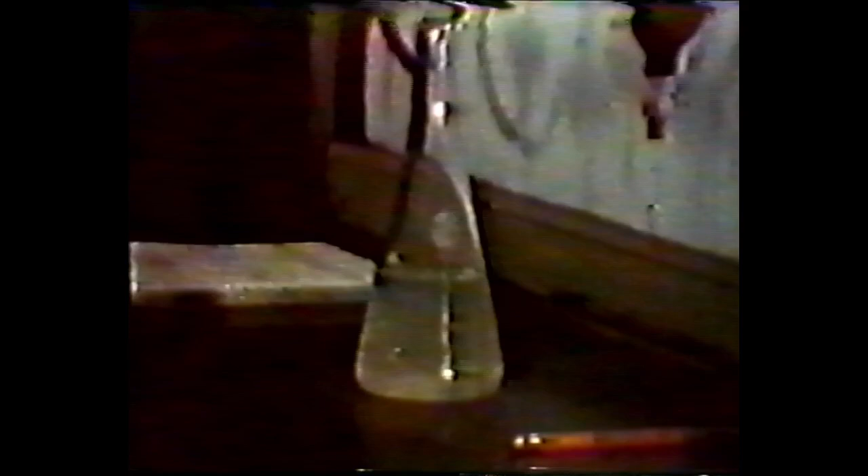To review the process so far, this is a typical sample of crude ore from the mine. The individual grains of iron oxides and silica are clearly visible. This material is crushed and ground in the autogenous mills to -14 mesh, and this crushed ore sample still runs 37% iron. In the process section, the spirals use the difference in the specific gravity to produce a concentrate running 66% iron. A concentrate which can be shipped as such or can be further improved into pellets.

And a tailings containing most of the silica waste from the crude ore. The tailings, however, still contain a certain amount of iron ore and are conveyed to the magnetic separation plant for further processing. The tailings, which are partially dewatered in cyclones, pass to cobber magnets. Here, all non-magnetic material is rejected as tailings, while magnetic material is passed on for reprocessing.

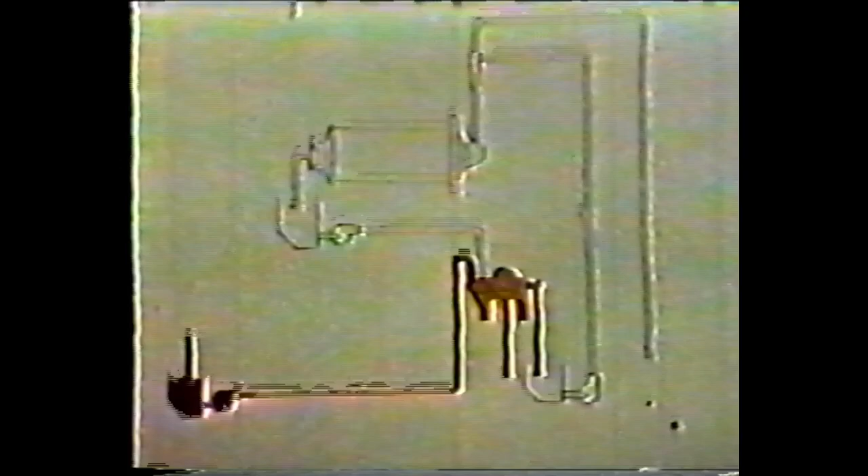Magnetic feed from the cobbers is pumped to rougher magnets. The non-magnetic fraction is rejected as tailings. The magnetic fraction is pumped to a cyclone. Oversize is reground in primary ball mills and returned in closed circuit. Undersize is passed for reprocessing.

These magnetic separators have fixed magnets inside a rotating drum. Magnetic material is picked up on the surface of the drum as it rotates over the magnet. As the drum continues to rotate beyond, the magnetic material drops off and is deposited for further processing. The non-magnetic fraction is not picked up and is discharged as waste.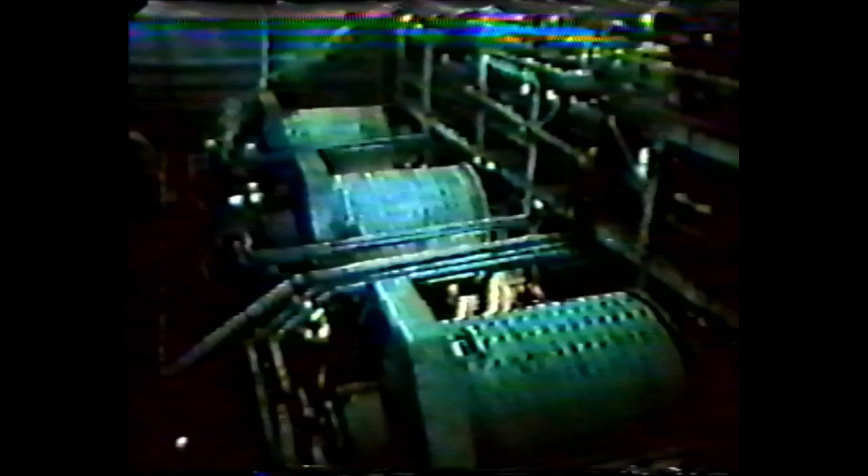The undersize from the primary regrind circuit is pumped to a secondary classifying cyclone. Oversize is reground in a secondary ball mill operating in closed circuit, while undersize passes through a DC magnet, causing the very fine particles to agglomerate. It is then passed to a thickener. In the mill bay of the magnetic separation plant are two primary ball mills and a secondary ball mill. All three are of conventional design.

Feed from the secondary mill is thickened. Overflow water is discharged, and underflow is pumped to finisher magnets. Non-magnetic waste is discharged, and the magnetic concentrate is pumped to the pellet plant. Final tailings are disposed of in a specially designated area in Wabush Lake.

To supply power for the mines and installations of the new mining area, a hydroelectric power plant was constructed at Twin Falls on the Unknown River, only a few miles from Churchill Falls. This was the second hydroelectric plant we had developed in Labrador. The first was at Menihek and was constructed to furnish power for our first mining area at Schefferville. Twin Falls is about 110 miles from the mines of the Carol operation, and power is transmitted at 230,000 volts for distribution at local substations.

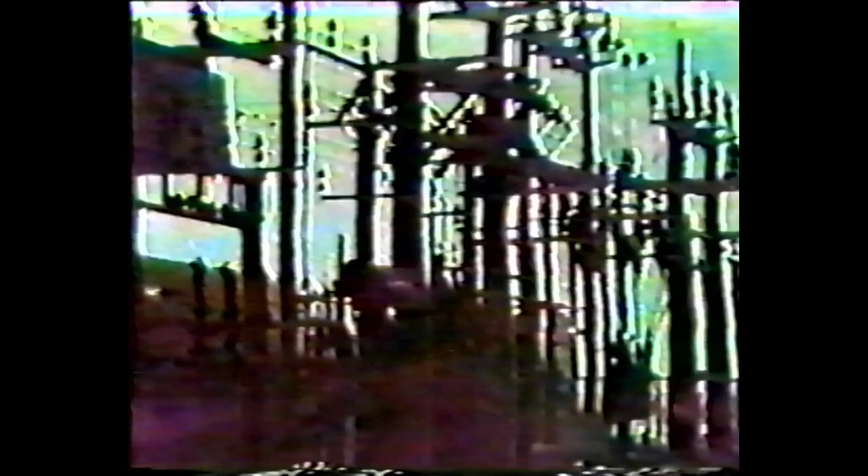Our engineers cooperate closely in the planning of mining areas, the construction of roads and buildings, the best use of equipment, and the distribution of operating personnel. How much stripping yardage is involved in this section, Bill? Probably about 100,000 yards.

The pellet plant, where the concentrate is processed into pellets, is built close to the concentrator. It is from the concentrator that the pellet plant gets its feed. The feed from the concentrator is weighed and distributed by tripper to storage silos in the pellet plant. Ore is fed from the bottom of each silo by table feeder and conveyed to the mill pulping box. Water is added and the ore reground in ball mills. The discharge is pumped to a classifying cyclone. Oversize is returned to the mill and undersize to thickeners.

In the regrind area of the pellet plant, the ore is reground to the best particle size for the formation of pellets. The table feeders under the huge 1,200-ton capacity silos provide a constant feed to the regrind ball mills. It travels from the feeders by conveyors at 100 tons an hour. The regrind ball mills are charged with steel balls which grind the concentrate particles to the final required size.

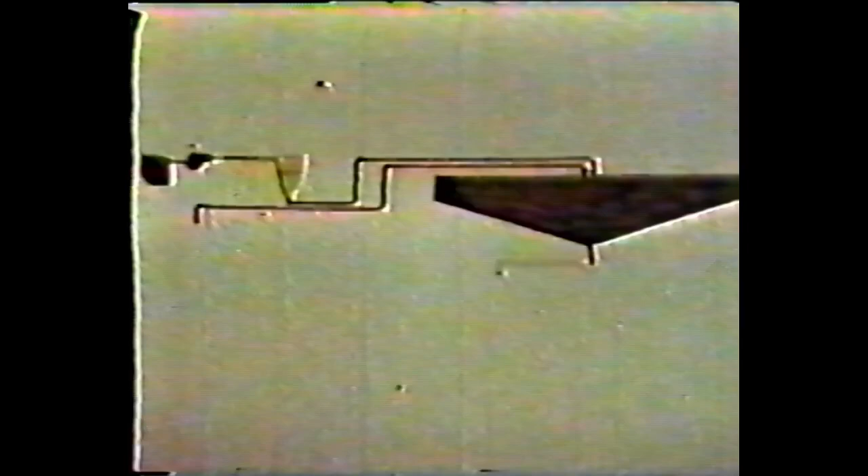Undersize from the regrind cyclones is passed to the thickeners. Product from the magnetic separation plant is weighed and added to the thickeners. Underflow is pumped to the balling section. The huge pond-like thickeners are situated outside the building, but the water is kept at a high enough temperature to prevent freezing in winter. The underflow is pumped to disc filters, where moisture is reduced to about 9%. The ore is stored and fed by table feeder to conveyor.

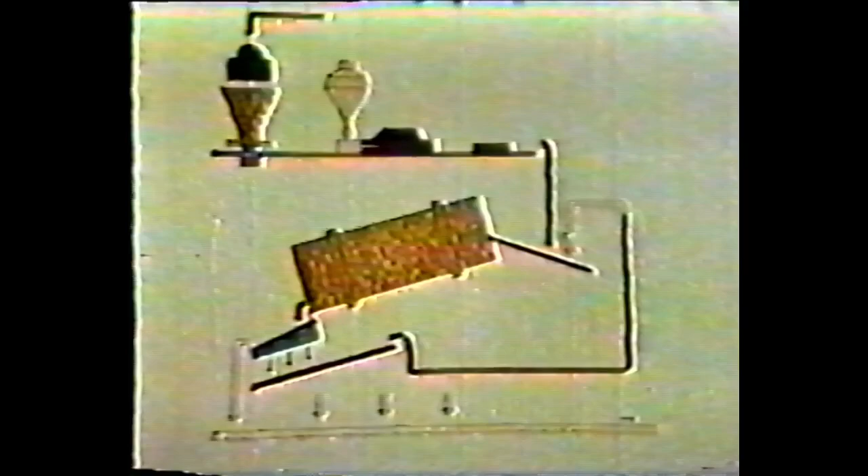Ground bentonite, used as a binding agent, is stored in a hopper and fed in controlled quantities. The components are mixed in a PK mixer, weighed and fed to the balling drum. Discharge is screened at 3/8 of an inch. Undersize is recycled and oversize goes to the green ball product conveyor. 4 drums feed one conveyor. The balling section of the plant requires very close process control to form balls known as green balls.

Vertical disc filters remove the moisture by suction before the product is mixed with bentonite. As the filters revolve, a vacuum sucks water from the solids. At the discharge point, low-pressure air snaps both sides of the section outward, and the filter cake drops into the storage bins below. Particle surface area, moisture, and percentage of bentonite are critical to the production of balls.

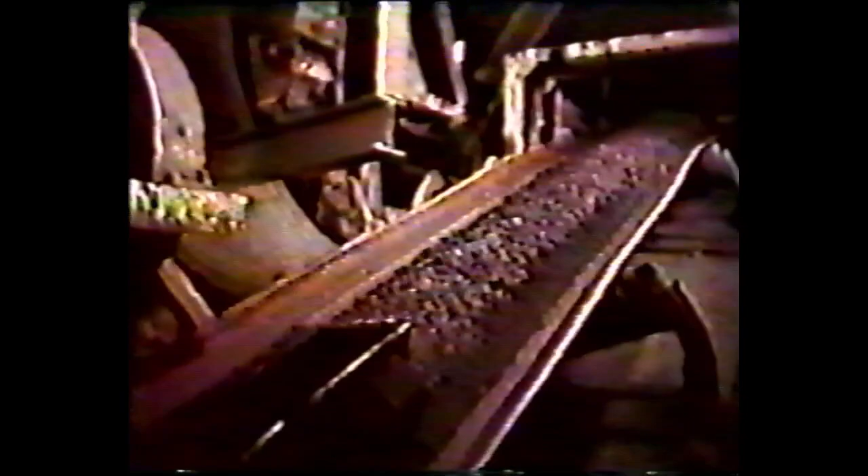The mixture of ground concentrate and bentonite is fed into the balling drums by conveyor. The green balls are produced by tumbling action. The drums are open and slope gently downwards, having a split spiral at the discharge end, which spreads the green pellets onto a vibrating screen. Undersized material goes through the screen and back to the drums again.

The balls are tested for mechanical strength by attendants who do a drop test, recording the number of drops before breakage. It is the close process control that ensures the production of even balls of optimum strength and firmness. At this point, the green balls are quite soft and plastic.

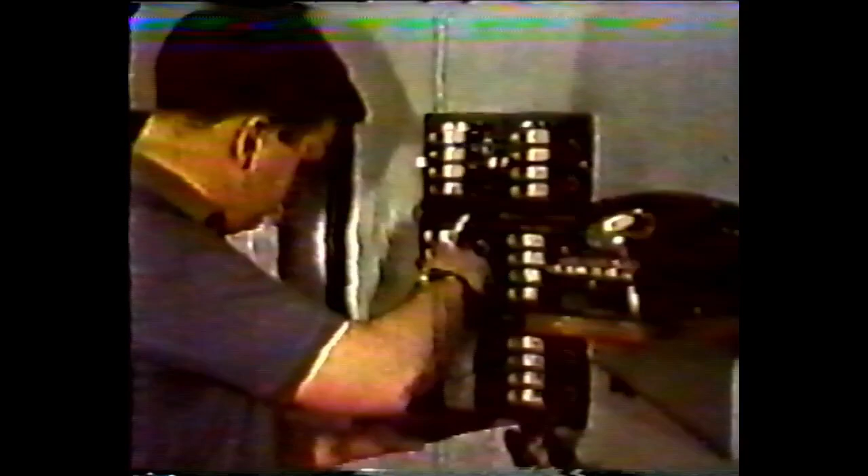The whole of the pelletizing process is controlled from this room. Banks of instruments are replaceable in units, so there is minimum delay whenever trouble occurs. The 100-foot-long control room has controls governing every stage of the pelletizing process ranged along the facing sides. Diagrams of these various stages are shown over each set of controls.

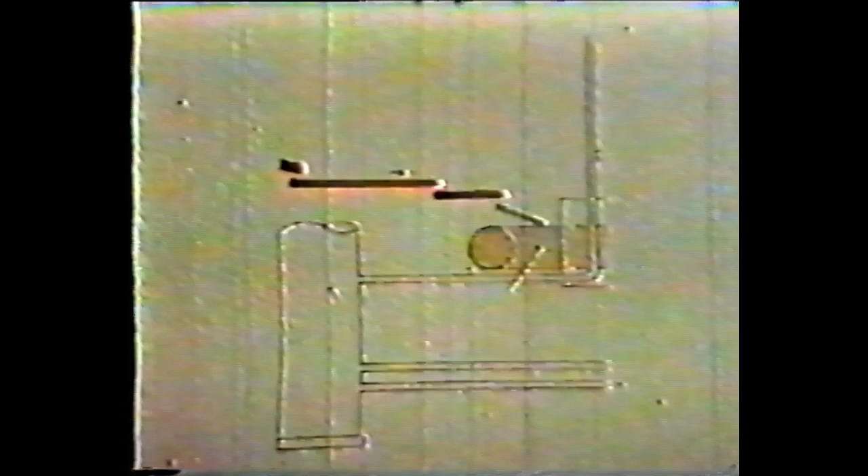Handling at this stage is important to minimize breakage. The green balls are conveyed to an oscillating conveyor, which spreads them on a roller conveyor. This acts as a screen to remove fines before the balls are loaded onto the pallets in the induration machine. Fired balls are used as a protective layer both on the sides of the pallet and under the green balls.

The green balls are passed through first and second stage drying to remove all moisture, then to pre-firing and firing zones where the temperature reaches 2400 degrees Fahrenheit. Cooling in the after firing and 2 zones of cooling is done slowly to avoid breakage of pellets. Temperature reaches 2400 degrees Fahrenheit, and attendants check the flame through small observation holes. For this inspection, the attendant uses special smoke glass to view the flame.

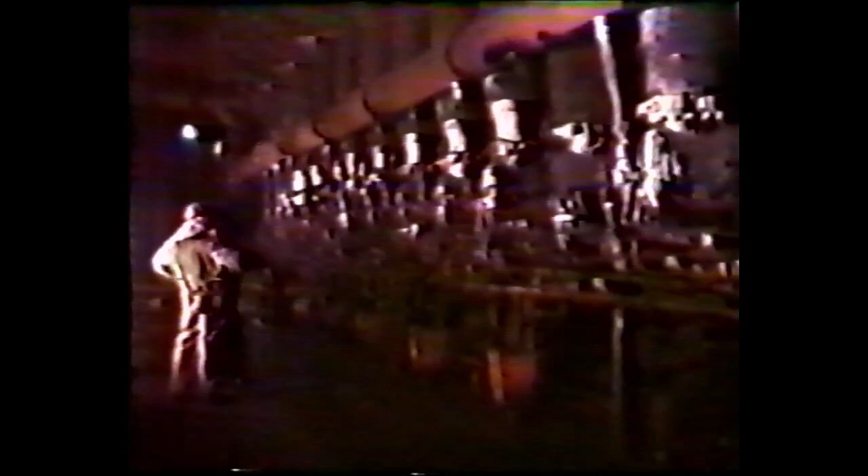The indurating machines are giant grates for firing the green balls, and the heating is obtained from a series of oil-fired burners on each side of the machine. In some areas of indurating machine checking and maintenance, asbestos suits are worn.

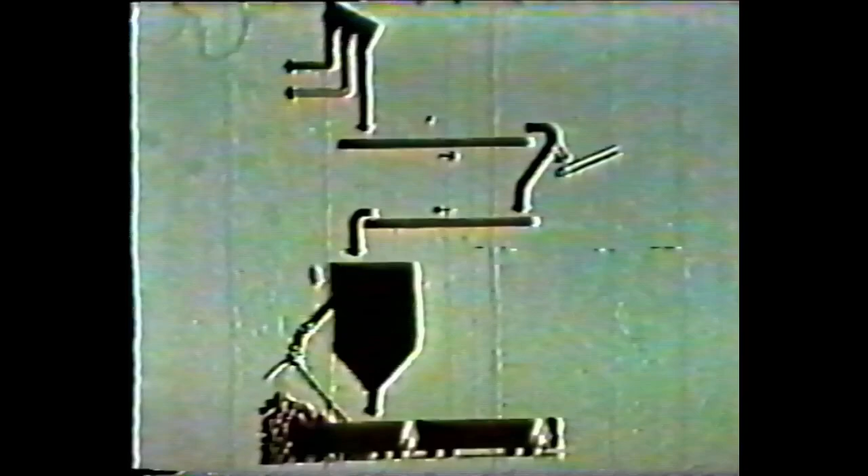The fired pellets are cooled before they are discharged onto a vibrating screen. The hard pellets from the induration machine are screened. Chips and fines are returned to regrind. A portion is taken as hearth layer protection in the furnace. The remainder goes to loadout. In an emergency, the product can be loaded into an emergency bin for direct loading of trains or emergency stockpile. Normally, the pellets go to the main stockpile.

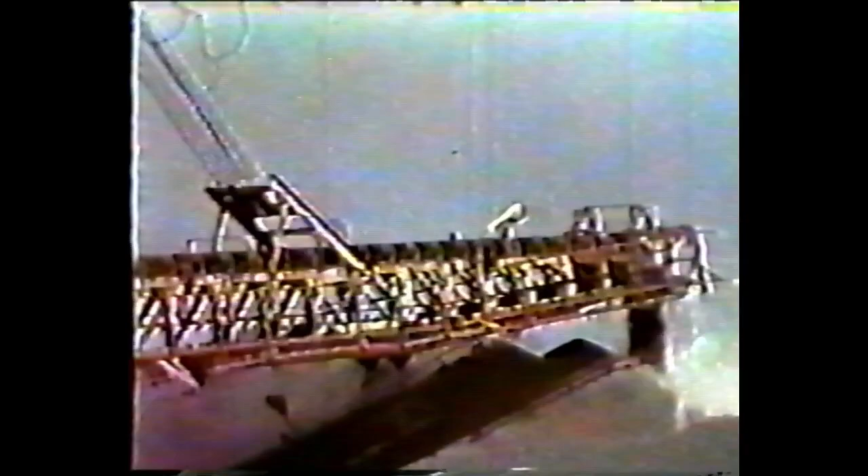The loadout conveyor feeds a surge hopper, which loads pellets into the ore cars for transportation to the port of Sept-Îles. The hoppers are situated right over the railway track, and from them, pellets still steaming are loaded into ore cars. Pellets such as these are the most preferred feed for the great steel furnaces.

And from the port of Sept-Îles, 3 kinds of iron ore are shipped to the steel furnaces. The Iron Ore Company is unique in its operation, able to supply direct shipping ores, concentrate, or high-quality pellets as needed by the steelmakers of the world. The Iron Ore Company of Canada presents Carol Mining and Concentrating Operations.